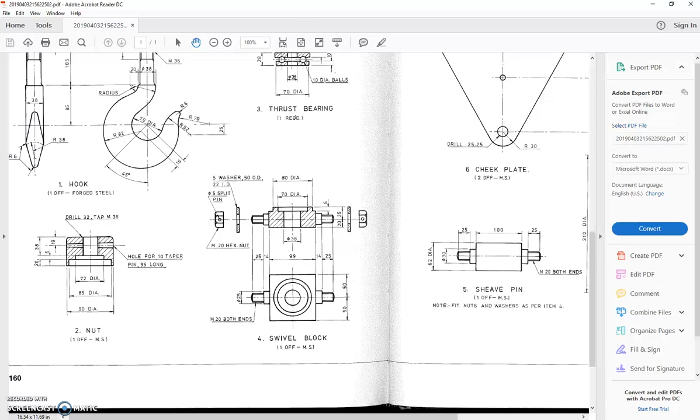Oh, you're back. Right.

This time we're going to have a look at part number 7, the sheave. It's made out of cast iron, so it'll look a bit different when we give it a material later on.

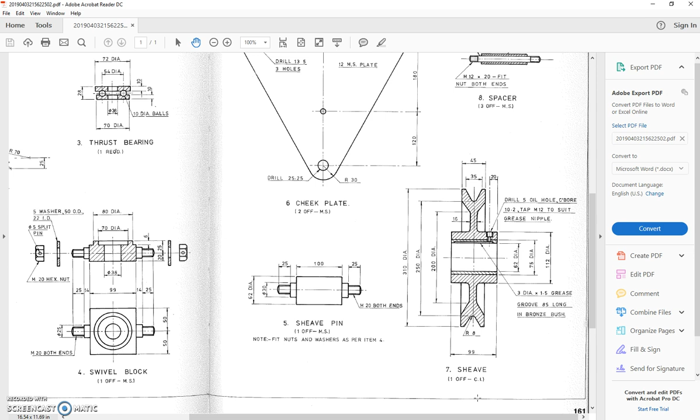Again, we're given another sectional view of a part. There's a whole bunch of diameters on here, and it's really interesting. This one is easier to see that it's 2 different parts. It's made up of 2 different bits. You've got this big outer bit with the V in it, and you can see that top and bottom. It is the actual pulley, the sheave itself.

Inside the sheave, there's nothing happening in here. This is a big hole. It's for the sheave pin, so that'll get slipped up and in there later on. This is a bush.

It tells me that it's a bush, say a bronze bush, and there's this grease groove in the top of it. That's a lot of fun to do, we'll do that in the next video. This video is going to look at just the sheave itself, and we're going to put that hole for the oil in after we have done the sub-assembly and put these 2 bits together and making sure everything lines up properly.

All right, so let's get into drawing this thing. How are we going to draw it? I'm going to draw a center line through here, the exact width of it. How wide is it? 99 mil, just like the swivel block we just did in the last video. I'm not interested in this first diameter here.

That is the clearance hole for the sheave pin to go into. We're going to start from here. This 75 millimeter diameter, that's that join between the bush and the sheave itself. Out to 112, then up to this one here, 200 for that change in direction. This one here, 250 for another change. 310 mil for the total diameter.

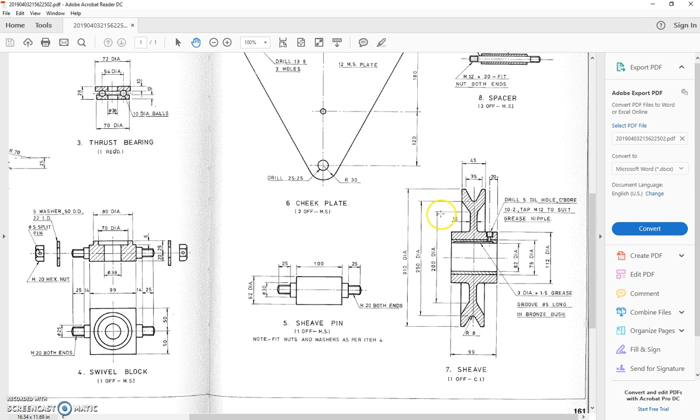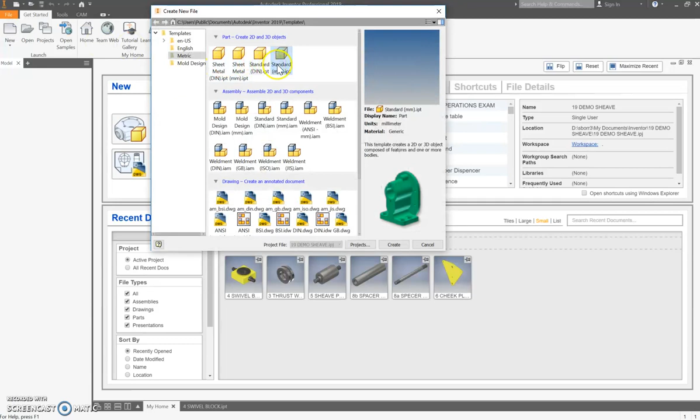All right, so let's hop into having a go at drawing this. Back to Inventor, there's our last one. I'm just going to close that. I have it saved already, so I don't need to save that one, although this next part I do need to save. So, new standard millimeter through our metric library as always.

And onto our drawing plane. I'm going to draw this one on my favorite old XY plane, starting with a center line. So line, center, and it's going to be nice and horizontal, 0 degrees, whatever, 99 long. Press the escape button to finish it. Get it kind of close. A coincident constraint, taking the center point and constraining it with the center there. Lock it in, Eddie, as they say.

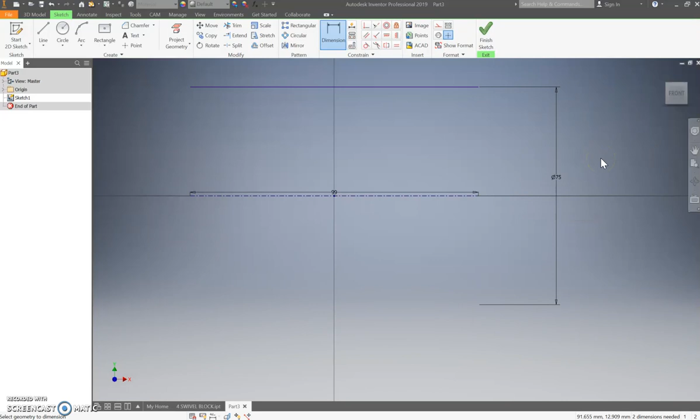All right, next, I have a line that runs across up here somewhere. Dimension, how far from the center? What is the diameter of this part here? That's not a bad guess, 75 it is. Okay, finish that off. Oh, not finish, you silly Billy.

Go back in there, here we are. Right. Now, I can set this first one up really easily. I looked for that dotted line to say, hey, do a vertical constraint here between those 2 endpoints. All right, it should have already done those for us. It's going to make sure that's 99 millimeters long. Right, next, back to drawing lines.

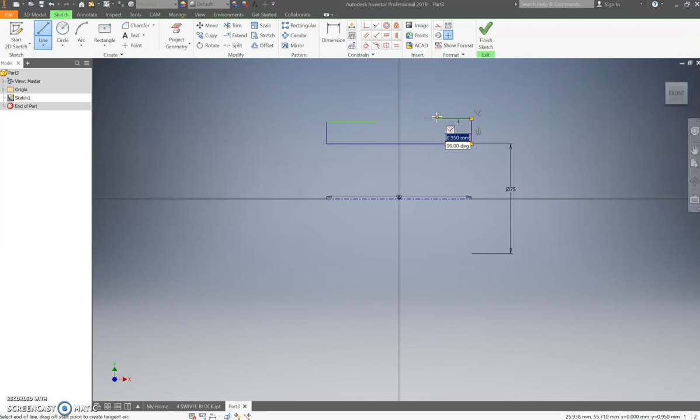I need, from that endpoint, looking for the green dot, this to go up and then head in toward the middle, but I need to stop. You can do the same thing from the other side. You can use your spacebar here to restart drawing a line, going up, in toward the middle, and escape to finish. Now I want those to be horizontally level, so I'm going to pick the center points again.

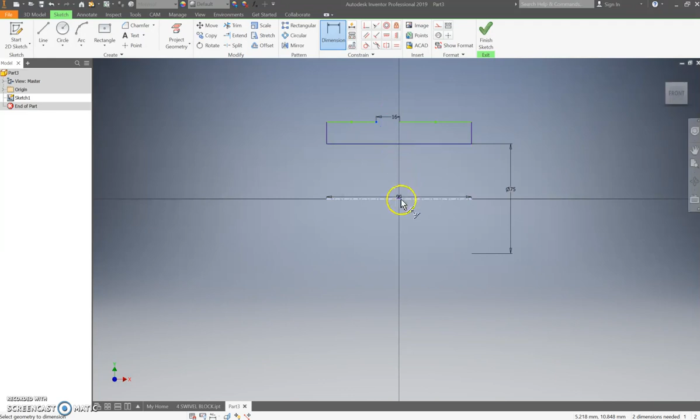Center point of this line must be horizontal with that one there. What I don't have any control over at the moment is how far apart these are. If I put in a dimension here and say, look, from that point to that point, we should be at 16 millimeters. Yep, well, but it's not very much in the middle, is it? So then I need to put in another dimension and say, well, from this one to the center point, oh, if I pick up the center point...

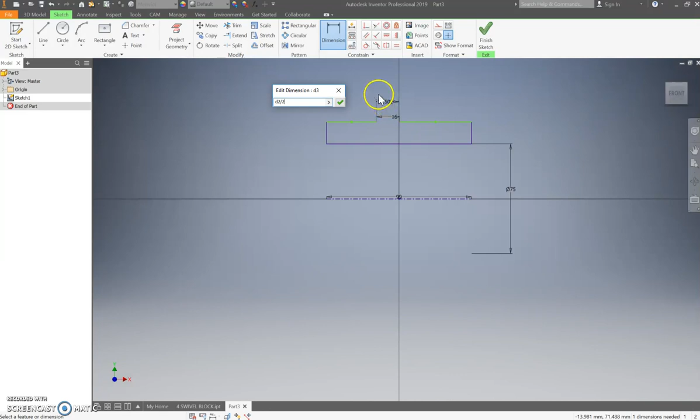That's not playing the game very well, is it? Let's try that again. Start with the center point, center point to that point. There we go. That distance there needs to be, can I move that box? I can. It needs to be that number divided by 2. That centers it up. Yeah, bit of a painful way of doing it, so we're not going to do it that way.

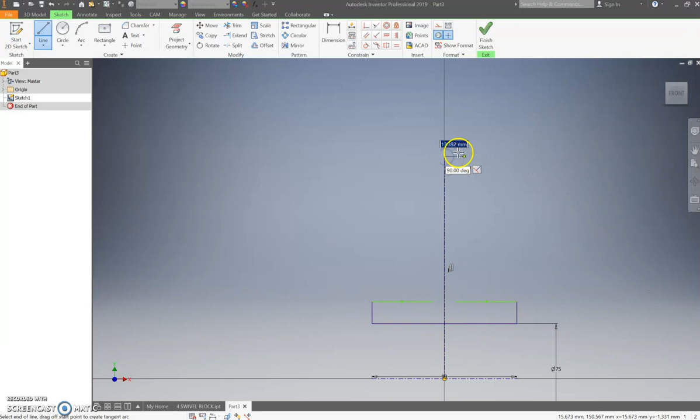I want to draw a new line. I want this line to be a center line, but a vertical one. Start it right in the center of your 90 at the bottom and run it up. Doesn't really matter how long it is.

In the middle here, on the bottom row of the constraints, you have this symmetric constraint. Have a read of it at your own leisure. Basically, what it's saying is look at this point and this point, now make them centered on this line. So those three work together.

I'm going to pop a dimension here as well, the height of this line, or the diameter of it. Why didn't that stay on? That line to the center gives us a diameter of 112.

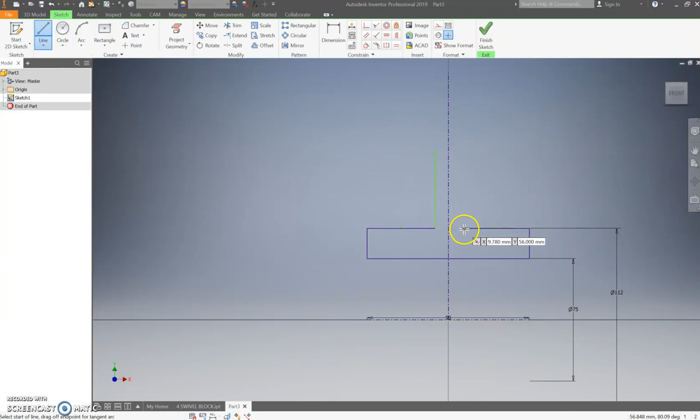Okay, now from there we go up. Classic me, I forgot to turn off the center line again. That line there, please, it should not be a center line. Select that, there we go. Draw a line from here up, get it square.

Tee off those ends with that horizontal constraint. Cool, dimension. What is that one to the throat of that curve? It should be 200.

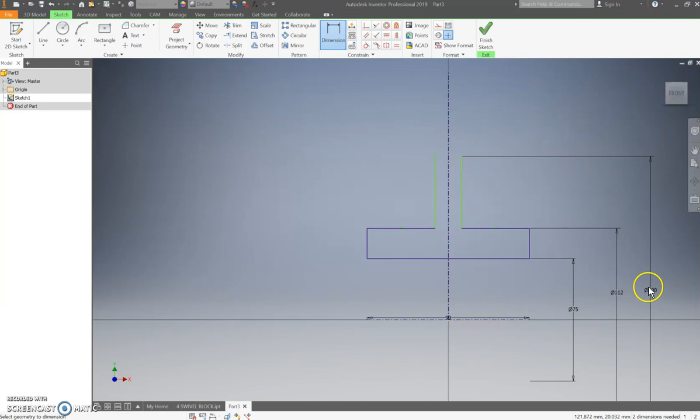Interesting, should have come up purple in my opinion. Oh, I know why it hasn't, because you haven't actually told it it's 16 millimeters wide. But we will now. Spacebar, escape, spacebar.

These ones go out here. Okay, so they need to be horizontally aligned as well. That point and that point need to line up. That point and that point need to be symmetric on this. Ta-da!

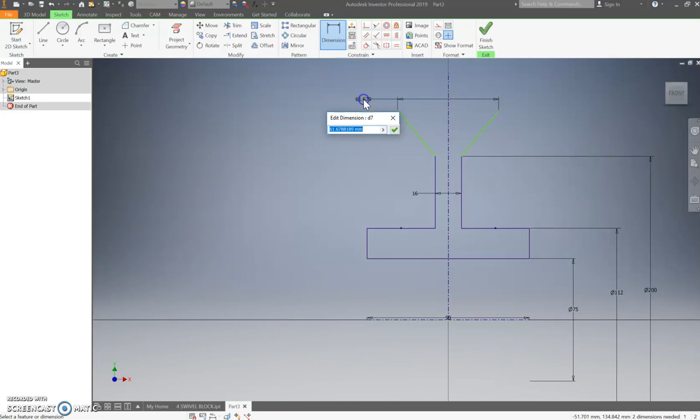And we're going to add in a couple of dimensions. This one to this one, that should be 16 - we sort of set that up before. The width of this section here, though, I'll just pop that up there. This bit should be 45 wide.

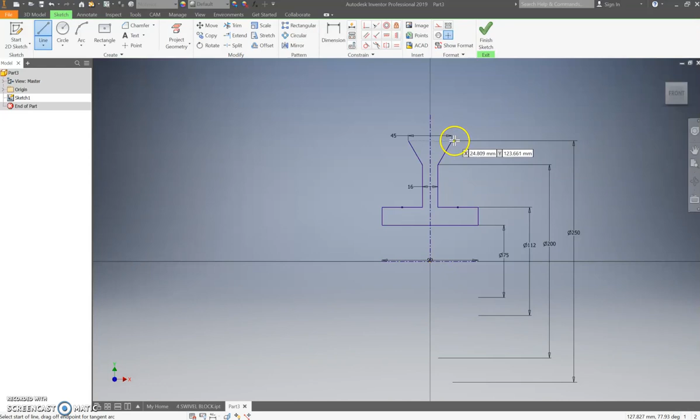We're given a diameter for that as well, so we're stacking in the diameters here. 250 to - that's not a 2, that is 250. Yeah, then it goes up a bit more to our 310.

Sorry, itchy nose there. I'm just going to draw this in. I'm not even going to put it on that center, I'm not even going to line that up. I'm going to line that one up though. All right.

Constraint time. The two tops, the center of that top and the center of this top, well, they should align. Vertically, the center of this point should line up with the center of that. Symmetrically, this one and this one should line up on this center line. Ooh, it's looking better. And horizontally, that bottom point of the V should actually line up with that point there. Yeah, dimensions.

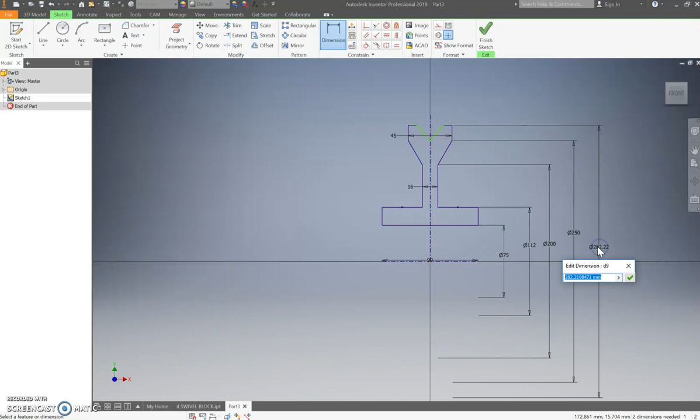This outer dimension here should be 310. Yep, and the other dimension, the width of this section here, was 35. Yay, done.

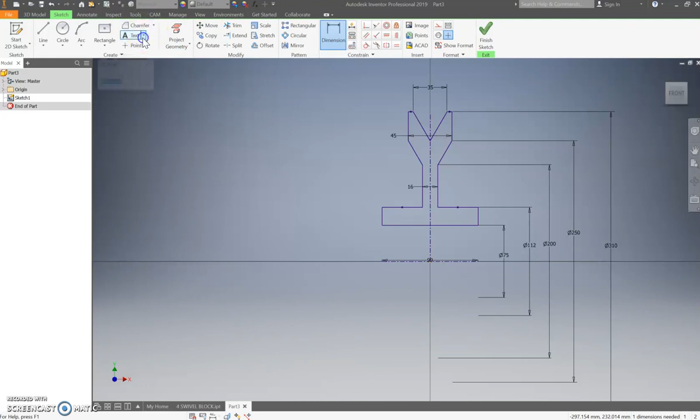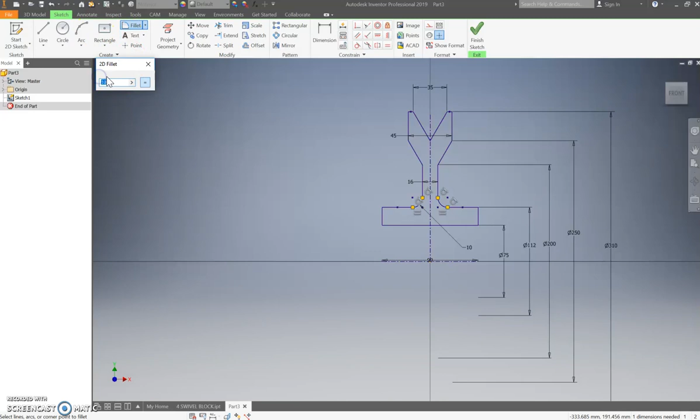Now there is a radius - where was that? It was a fillet. So let's change that back to being a fillet. It is a fillet of 10mm radius, and it sits in this corner down here. It doesn't have an arrow pointing to any of the others. The only other one that does actually have a fillet attached to it is in the bottom of the V for the sheave - it's an 8mm radius. Just double checking, yep, that one should be an 8.

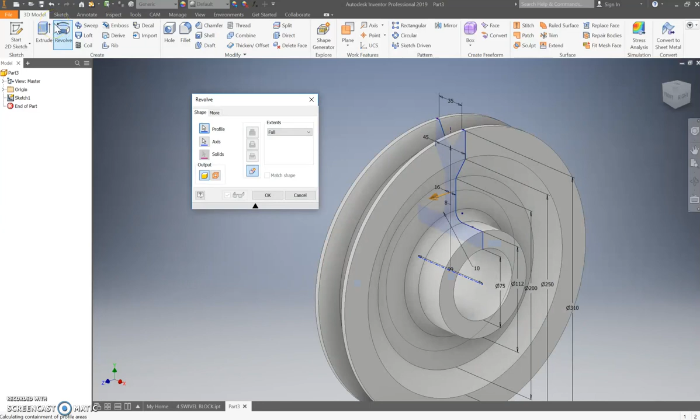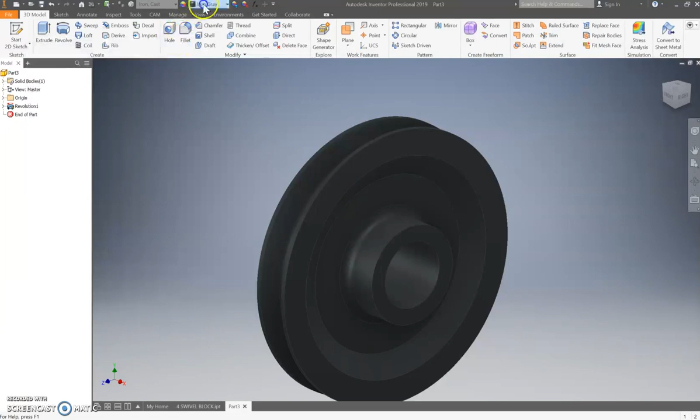There we go, there's the basis of my sheave done. I know it seems a little bit rushed. This is a revolve, it automatically picks it up - there's one profile, there's nothing else for it to choose from. Full rotation. Like I said, this is going to look slightly different because it's out of cast iron - quite dark. If your resolution is quite good, it will actually come up looking quite grainy as well.

We will paint this. We've painted everything else on this one in smooth yellow - good old smooth safety yellow. Which surfaces are going to be machined? All right, that'll be machined, that'll be machined.

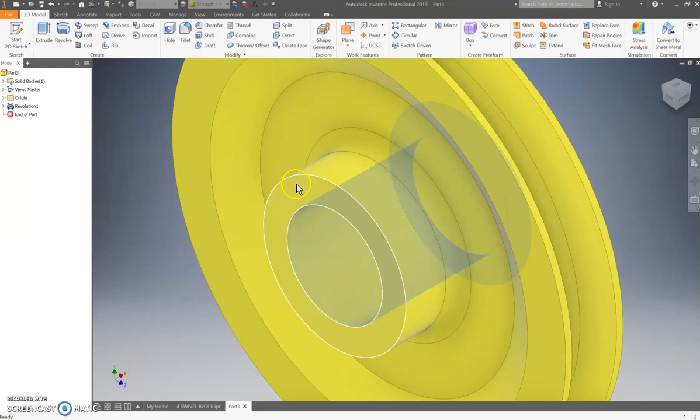Turning it around a bit. That one I would believe to be machined, and quite often this is going to be machined in here to get some accurate sizes for cables and so forth to run through. That one and that one there. Right, so we'll make sure they are looking fantastic.

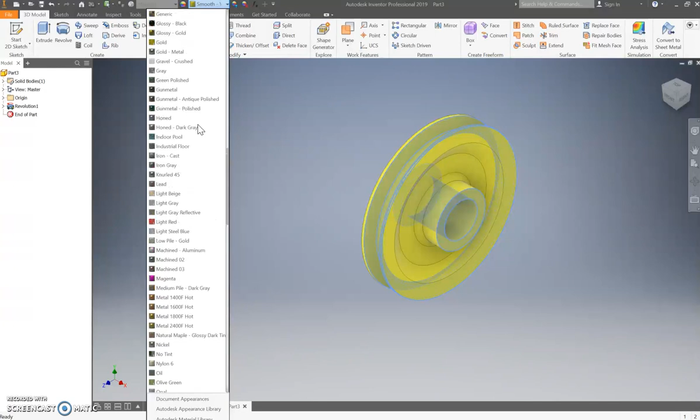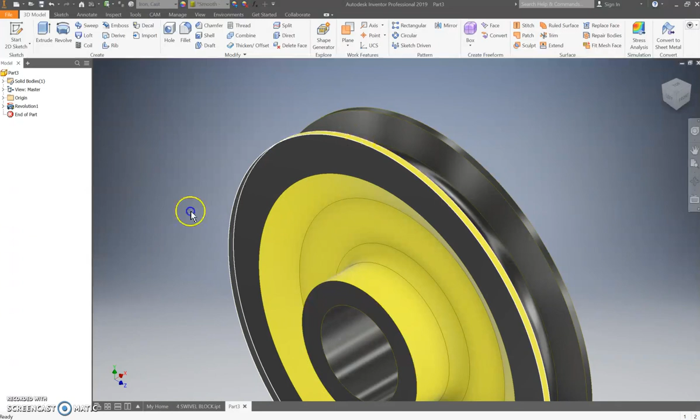We'll make them honed. There it is. Those ones are honed. You could probably do this one out here too if you wanted to, and add that one in - I'm going to, just because I think it looks better that way. And I can see I've missed that edge up here too. There we go, I think we've got it now. Soon be able to tell. Nope, didn't get that one. It's smooth yellow at the moment.

And beautiful, there is my single sheave. So we're going to call this one - better put a number on the front of it. Here we go, this is part number 7, 7A sheave.